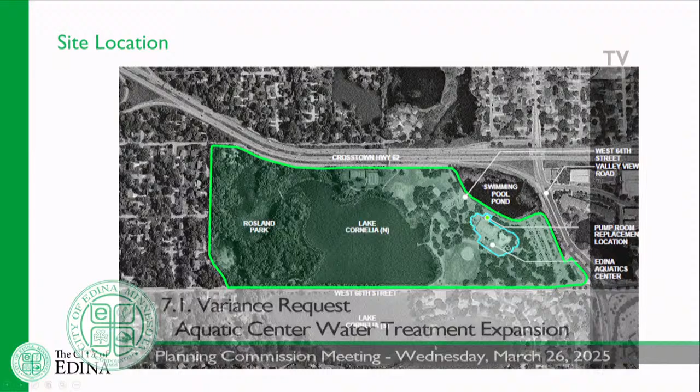Thank you, Chair, members of the Planning Commission. This is a variance request for 4300 West 66th Street, the Edina Aquatic Center, specifically the pump house building. This is the site: the pump room is on the east side, closer to the north part of the facility. West 64th Street comes around the parking lot and swimming pool, sitting between the pond and the pump house, then continues north.

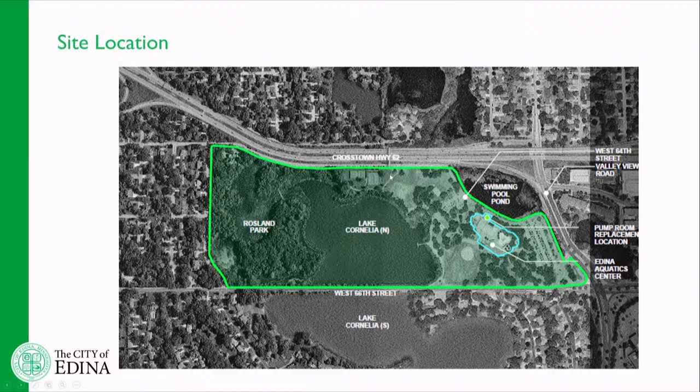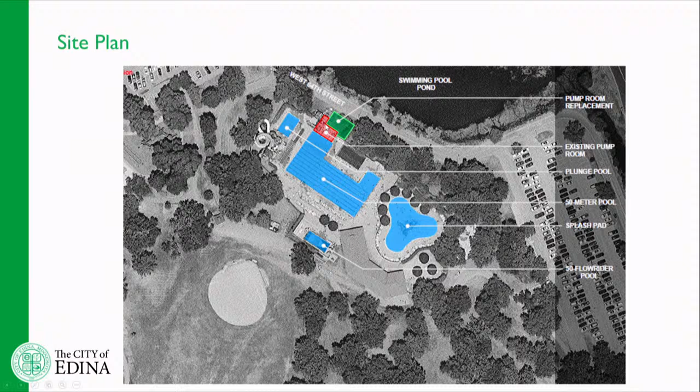The request is for a new or expanded portion of the existing pump house. This slide shows in blue all the water bodies at the aquatic center on the upper level, and on the lower level the red portion is the existing pump room, with the green portion being the addition. Most of the existing building is underneath the pool deck, so you only see a small portion when looking at the east side.

These are the existing conditions, looking down at the pump house. You don't see most of it — again, this is the only portion of the pump room currently visible. There's a loading dock and an access drive on the north side.

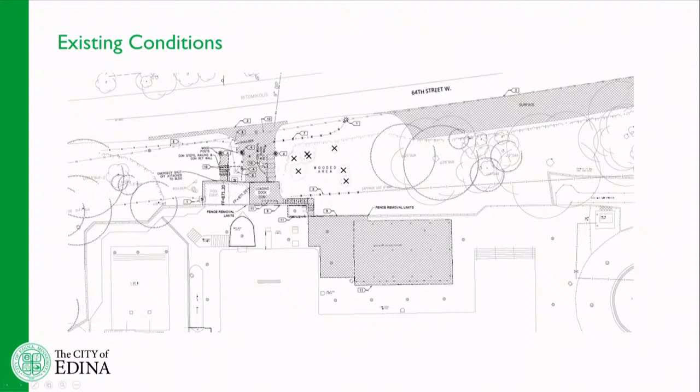Here are some photographs of the existing conditions, showing the east side of the pump house building. This is the portion not underneath the pool deck. You can see the pool deck further back, with most of the building underneath it, along with the driveway and loading area.

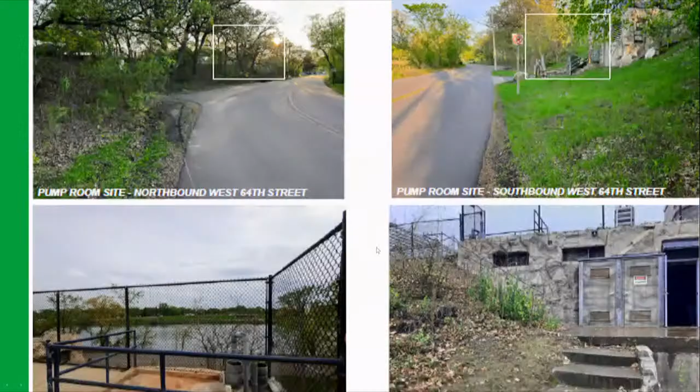Some more views of the pump room site, looking northbound and southbound on West 64th Street. If you're up on the pool deck looking down east over by the pond, and then an east elevation.

The applicant, HGA Architects and Engineers, on behalf of the client, City of Edina, is requesting an 11.5-foot variance from section 36-1268, requiring a 50-foot setback from the ordinary high water elevation of the pond, for a proposed pump house room facility replacement and expansion. The pump house room is located east of the original pump house room, situated between West 64th Street and the pond.

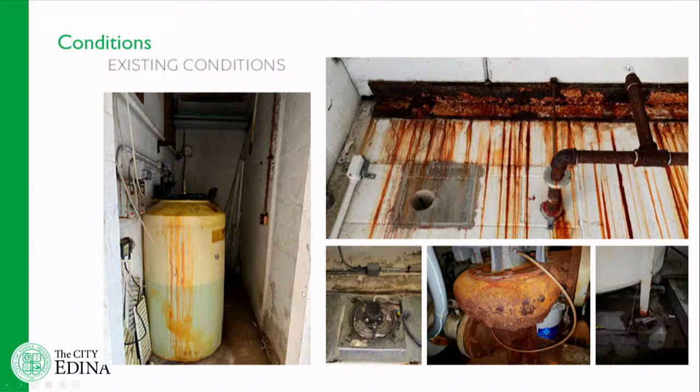Here are some photographs of the existing conditions and the interior of the building. The following slides include exterior and interior photos of the current building.

HGA Architects and Engineers were contracted by the city to perform a conditions assessment of the existing pump room. The report outlines several critical deficiencies, visible in the photographs, to the structure, mechanical and physical condition, which is operationally outdated. The Aquatic Center opened in 1958, with some current infrastructure 67 years old. The original pump room has undergone retrofits and additions over decades, but years of exposure to corrosive gases and a very limited headroom, ranging from about 8 feet to 9.5 feet, makes the space unsuitable for current equipment.

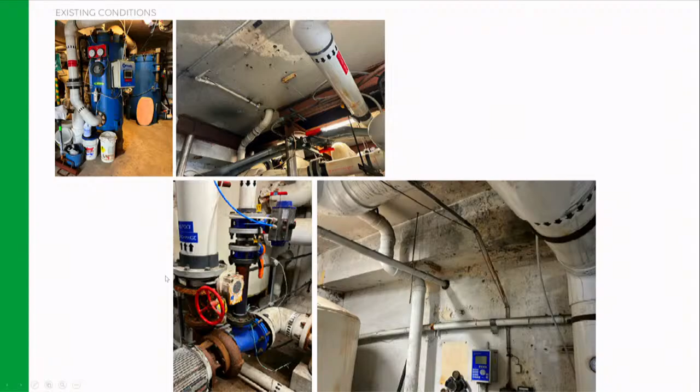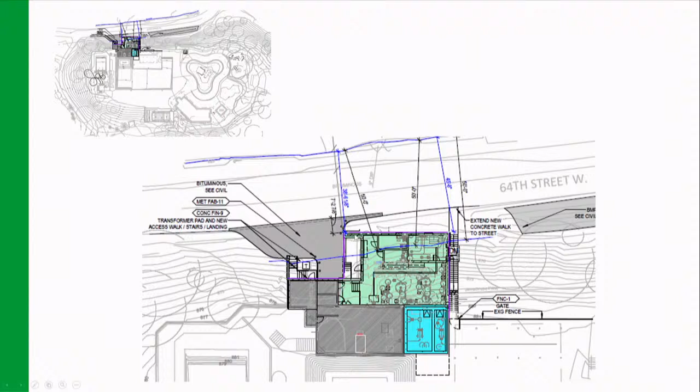This slide shows the proposed main floor site plan of the expansion, with the setbacks of the new portion of the building. The minimum setback is 50 feet — you can see the blue line marking the minimum setback from the pond. This portion overlaps into the setback area; the closest point is at 38 feet 6 inches, while the corner to the south of the new building is at a little over 45 feet, forming a triangular portion overlapping into the setback.

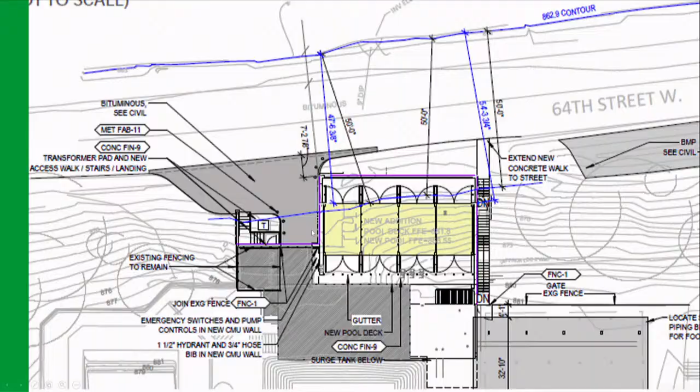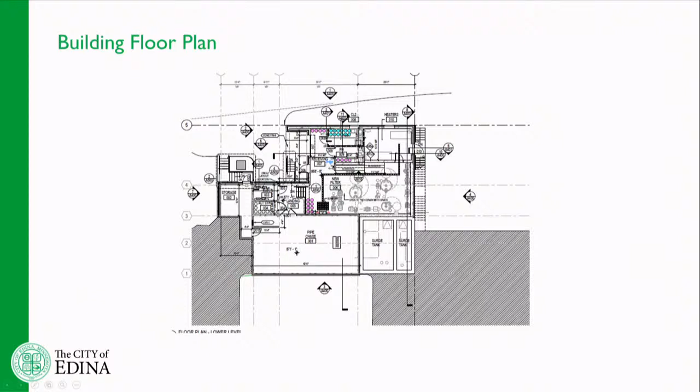And a more detailed building floor plan, giving an idea of the equipment and facilities that will be included in the new building.

These are some renderings and elevations of the new building and structure, showing the amenity deck with pool cabanas, looking northbound. You see the lower level, which houses the pump room with all the mechanical facilities, and then the upper deck with cabanas further away, and an upper deck on the east side of the cabana area.

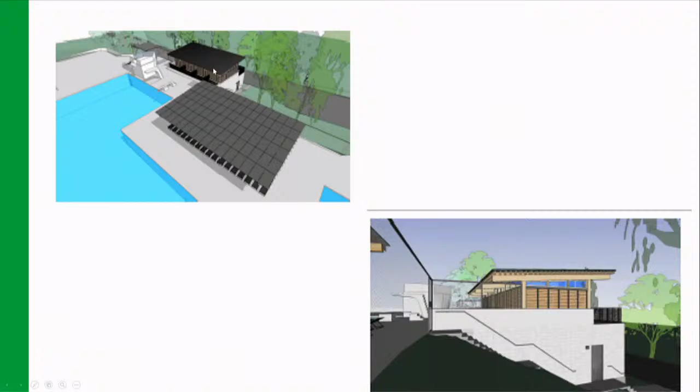This is a bird's eye view of the area we're referring to, also a covered area for lounge chairs in that cabana area above the pump room, and then an elevation of the south side of the building.

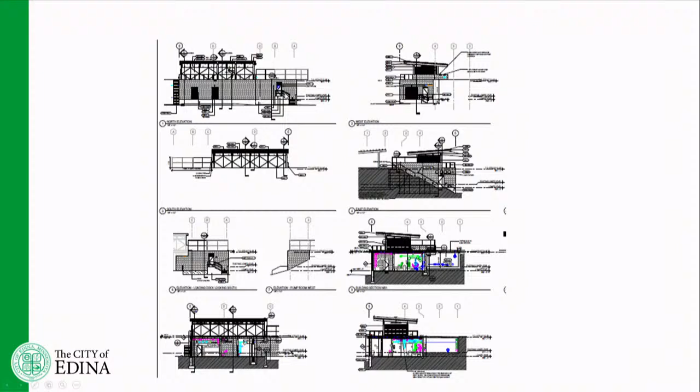This is a slide of the hand-drawn elevations and a comparison. They're not to scale to one another.

This is an existing cutaway of the pump room, showing ceiling heights of 8 feet and 9.5 feet, which are subpar for the equipment that needs to be installed. And then the proposed building with an increased ceiling area, and again, amenity deck above.

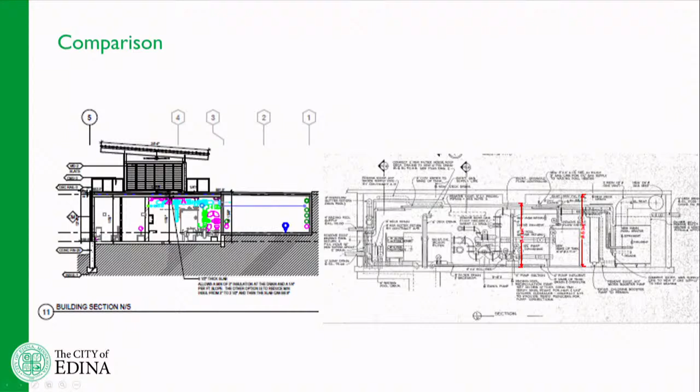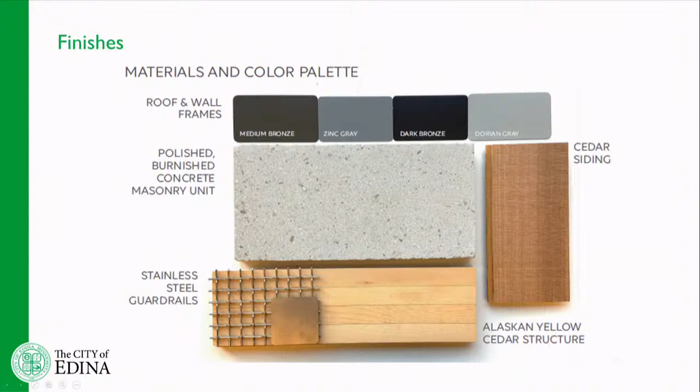This is the materials and color palette that's going to be used, and it will be consistent with the bathhouse above along the pool deck. This will all be graffiti resistant for the pump room area.

Staff recommends approval of a variance from the Edina City Code, section 36-1268, to allow an 11.5-foot variance from the requirement of a 50-foot setback from the ordinary high water elevation of a naturally occurring lake, pond, or stream, to allow a setback of 38.5 feet at the closest point of the pump room facility.

Approval is subject to the following findings: that the proposal for the pump room expansion is reasonable. The use is a permitted use in the single dwelling unit district. The aquatic center and all of its necessary parts are compatible uses within the single dwelling unit district. The use is consistent with the future land use designation for low density residential in the comprehensive plan.

The variance is needed due to the functionally obsolete size of the existing building, built in 1958 under different setback requirements, which are a current holdover from conditions not created by the applicant or the aquatic center. Prior to 1990, the setback required from the ordinary high water elevation of the pond for the pump room was 25 feet, and it conformed at the time.

The variance is to allow the expansion of the proposed pump house space that will not alter the essential character of the locality. The new pump house with the upper pavilion will enhance the user experience of the center and address current operational deficiencies with minimal intrusion into the setback.

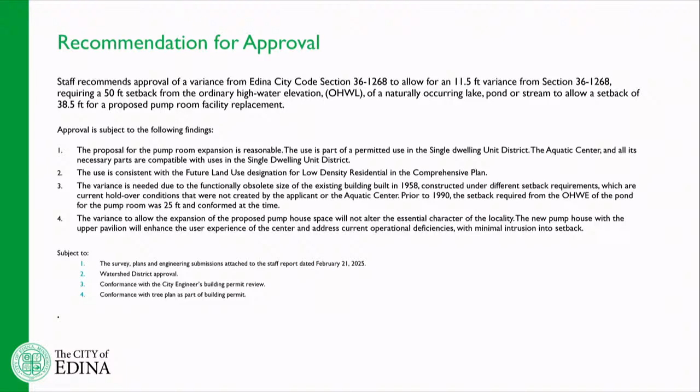Approval should be subject to the survey plans and engineering submissions attached to the staff report dated February 21st, 2025, watershed district approval, conformance with the city engineer's building permit review, and conformance with the tree plan as part of the building permit. With that, I'll stop and answer any questions you may have.

Thank you very much, Chris. Great presentation. Like I mentioned, we're going to offer it up to the rest of the project team or applicant to come forward.

If there's anything else you'd like to add? No? I see a lot of head shakes to the side. No? All right, gone. Okay.

I guess if any commissioners have questions right now for staff or the rest of the project team, this would be the time. Commissioner Day.

Do you know why we changed from 25 to 50 feet in 1990 for the setback? It was mandated by the Department of Natural Resources. It's not something the city had a choice about. Okay, all right.

Commissioner Nelson: I'm assuming you had some preliminary discussion with the Watershed District on this? Engineering has. They've been working very closely with the Watershed District on it, as has, I believe, HGA as well.

No other questions? Can you tell me a little bit about the swimming pool pond? Is that an official name, is that what the city calls it? Yeah, the swimming pool pond. It does collect runoff from the facility. I am not as well versed on that particular pond as some others. It is considered to require a setback, meaning it was a naturally occurring lake, pond, or stream.

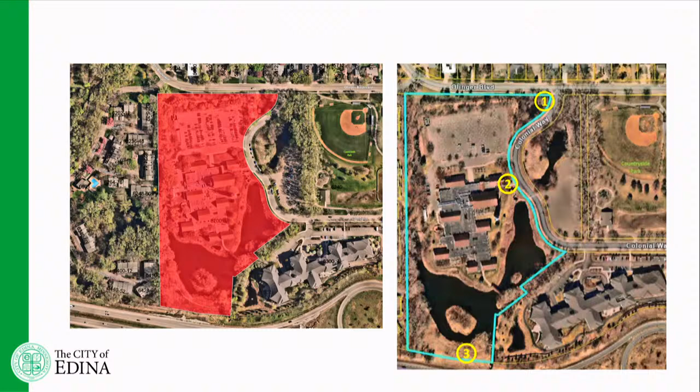Thank you, Chair and members of the Planning Commission. The request tonight is for 2 sign variances for 2 signs at Meeting House Church located at 6200 Colonial Way. The site is located at the southwest corner of Olinger Boulevard and Colonial Way, north of Highway 62 and west of Countryside Park. The 13-acre site is zoned R1 Single Dwelling Unit District and is the existing site of Meeting House Church. The church is currently in the process of replacing their existing signage on site, and is proposing to install 3 monument signs along their 3 street frontages: Olinger Boulevard, Colonial Way, and Highway 62. Currently on site there are 2 existing signs. At a time in the past there was a 3rd sign adjacent to Highway 62, but over time it has fallen.

The first variance request tonight is for sign 1. It's located at the intersection of Olinger Boulevard and Colonial Way. There is an existing sign in a similar location that will be removed and replaced with the proposed sign.

The variance request tonight is a 30-foot variance to the 50-foot setback requirement from the ordinary high water elevation of the naturally occurring water body. This would allow the proposed sign to be placed at least 20 feet from the ordinary high water elevation. Engineering staff has reviewed the proposed location of the sign and did not have any concerns with the location of the sign in proximity to the body of water.

In this instance, the 50-foot setback, as well as the required 20-foot setback from the curb for signs, would not leave any space for a freestanding sign at the corner at this intersection. There's also a 10-foot drainage and utility easement that the applicant is avoiding with the proposed location of the sign.

The second variance request tonight is a sign height variance for sign number 3, the proposed sign adjacent to Highway 62. The request is for a 6-foot height variance to allow a 14-foot tall monument sign. The applicant is requesting the additional height due to the elevation of Highway 62. The additional height will allow the sign to sit 8 feet taller than the center line elevation of Highway 62, which is the allowable height for monument signs in the zoning district.

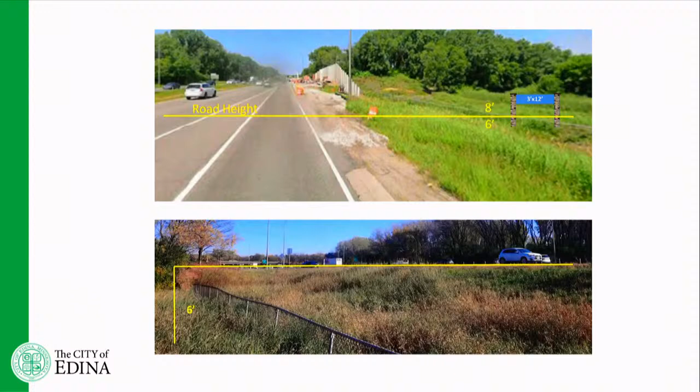Staff believes that the requested variances are justified. The purpose and intent of the code is to allow for monument signs that provide visibility without causing impacts on safety or sightlines. The requested variances would be in harmony with the general purpose and intent of the code, and the use of the property would remain consistent with the comprehensive plan.

There are practical difficulties in complying with the city's ordinance. The elevation height for sign 3 is reasonable due to the difference in elevation of Highway 62 versus the subject property. The applicant is requesting the additional height so the sign is visible 8 feet taller than the elevation center line of the road. The additional height for that sign is needed for visibility.

The location of sign 1 is in a similar location to the existing sign on the site at the corner of Olinger and Colonial Way. The proposed location of the sign sits much higher than the body of water and won't have any negative impacts. Like I said, the city's engineering department did review the sign location and didn't have any concerns with the sign in proximity to the body of water.

In each situation, the circumstance is unique to the property and is not created by the landowner, and the proposed signage will not alter the essential character of the locality.

So tonight, staff's recommendation is to approve both of the requested variances based on the findings and conditions outlined in the staff report. I'll note again that one of the conditions of approval is that illuminated signs would need to meet the city's illuminated sign requirements of the sign code.

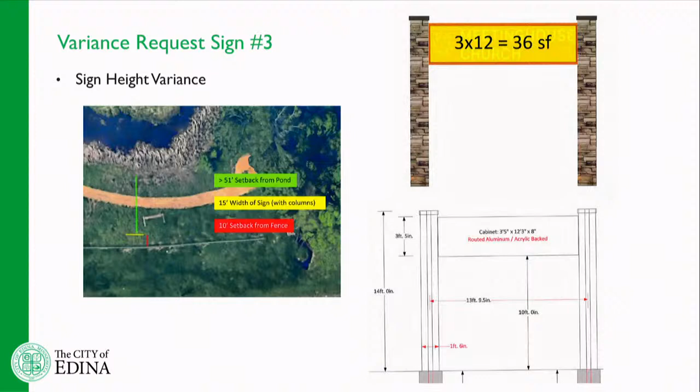Just real quick, Earl, all the signs appear to be double-sided. It was a little hard to tell the one over on Olinger if it was double-sided or not, but it backed up to trees, so I assume it's not. Correct, that one will be double-sided. It has been single-sided at a little bit of an angle as you drive in there, but this one will be double-sided. It'll be perpendicular to Olinger. Correct, double-sided.

Any other questions? Commissioner Felt.

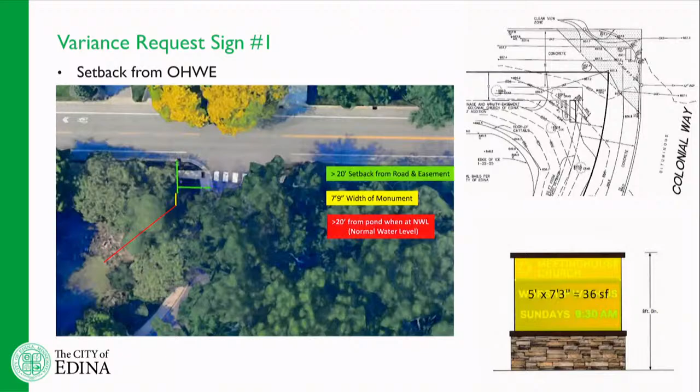Are you planning on keeping the signs lit or electrified 24 hours a day? Or what's the plan for that? I think the plan really is to go with the city rules and regulations on those. We may just turn them off at 10 o'clock at night. There's no reason probably it has to be on.

Really don't want flashing lights. I'm sure the neighbors don't either. It's mainly so we can change some of our things once in a while with different services, different things going on. It's not to be a billboard that's advertising all the time.

That'd be nice if it was turned off at 10. I don't know what are the... Yep, the hours of operation are that the sign's turned off between 10 p.m. and 7 a.m. unless the use is open.

Okay, thank you. And just to note that with the video board, it's also not allowed to be changed more than once an hour unless it's the time or date or temperature.

Hopefully the temperature is accurate. You guys remember those back in the day where it's like 900 degrees out? Hopefully you guys don't have those struggles.

Any other questions? Thank you for the presentation.

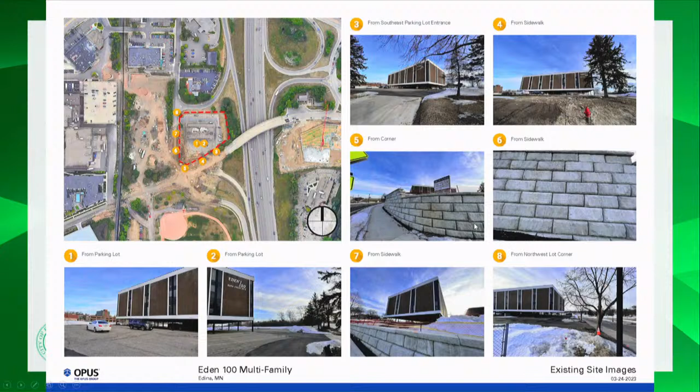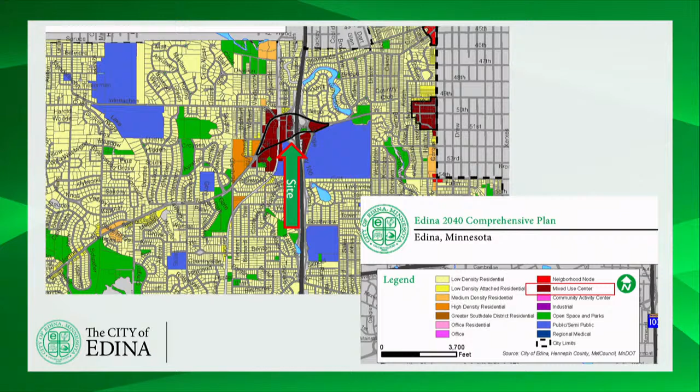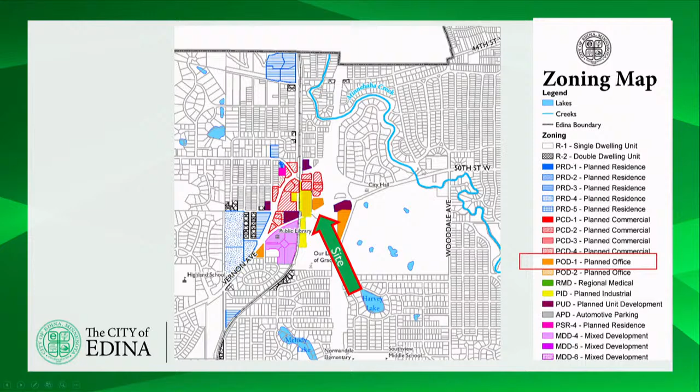You may recall this site received a preliminary rezoning from the POD to a PUD. It was for a housing project, and I'll show some slides of what that looks like here in a minute. Same goes for the Public Works site—preliminary rezoning was granted for that site for the cooperative housing, the restaurant, and a park. Both of those projects did not move forward, so there was no final rezoning. So the existing POD is the zoning on the site.

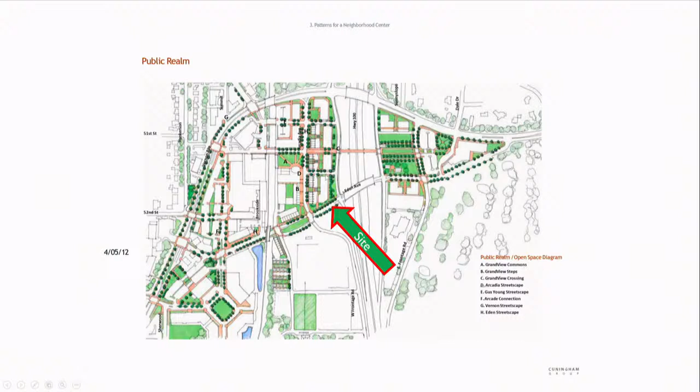Within the Grandview District Development Framework, also mixed use, these are some graphics of what was contemplated for possibility of being built on that site. Housing along the street, some renderings with some housing. There was also some thought of Chair Bennett's favorite slide here.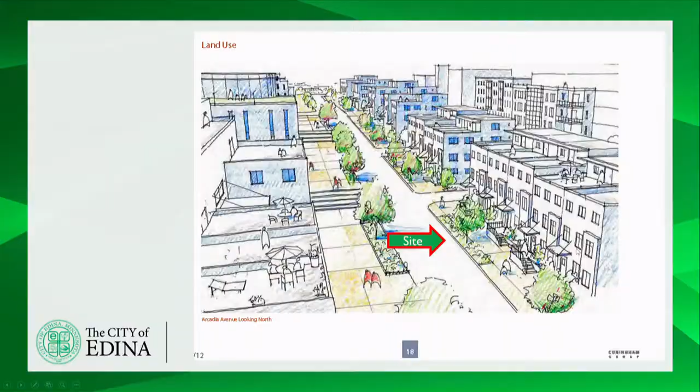There was talk of either residential or office on the site as we went through that process. We also did the transportation study in this district. There is a new frontage road planned on the west side of Highway 100. All of that can be accomplished within the existing Highway 100 right-of-way, so there's no additional land needed with this project.

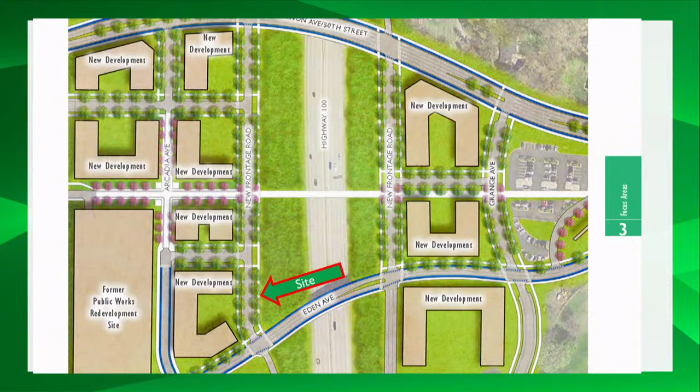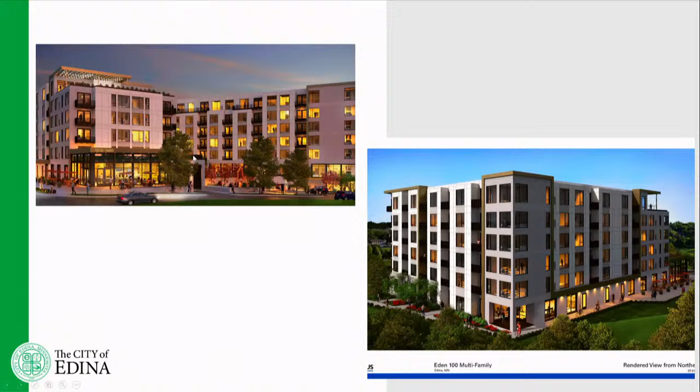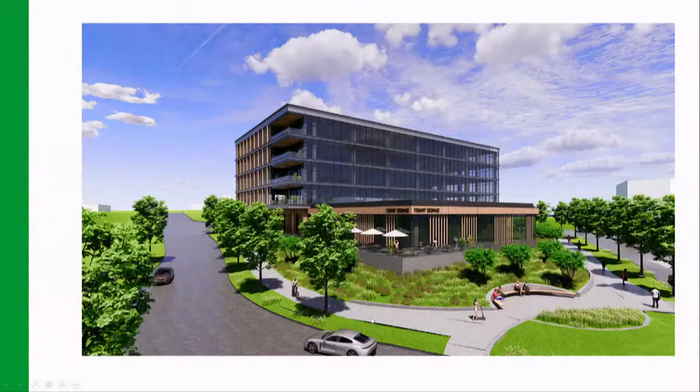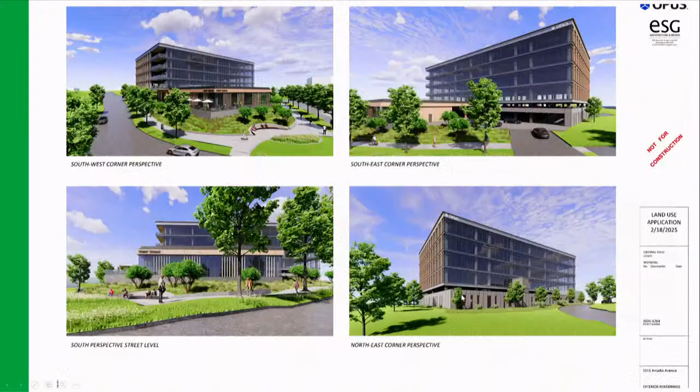So here's a look at the proposed structure. They would tear down that existing building. It's about 38,000 square feet, the existing building, and build this 112,000 square foot office building. There also would be retail space potentially, about 6,000 square feet, potentially a restaurant also, located here on the corner. So note the expanded sidewalks, green space along the roadways. The applicant, as part of their presentation, actually their pictures are a little better than this, so you'll see some enhanced imagery as part of their presentation.

Primarily a glass building.

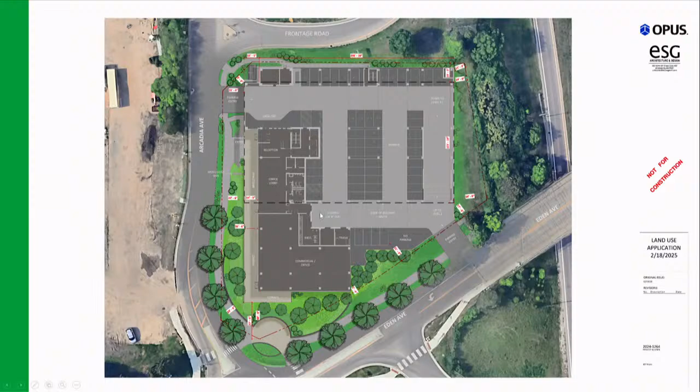Here is a look at the site plan, with one access off Eden Avenue here, another off of Arcadia. The bulk of the building is set back with that one-story commercial space located here. So this request requires rezoning from Planned Office District to Planned Commercial District 2, a subdivision or new plat. There's 7 lots currently on that site, so they're going to consolidate them into one with a new plat, a site plan, variances on all 4 sides for the building, a variance from our floor area ratio requirement of 2.

They're proposing 1.5 is the requirement; they're asking for 2. A variance on height to allow 81 feet, where 48 is required. And a variance for the building materials, as I mentioned, it is primarily a glass building. Also a variance for screening and setback requirements for utility equipment.

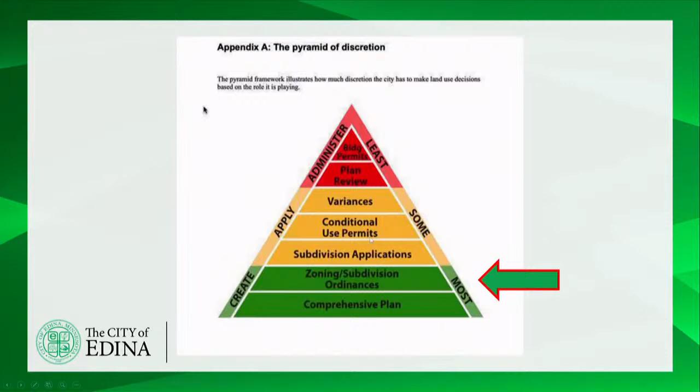So looking at our pyramid of discretion, this is a rezoning, so the city does have discretion here. Variances and the subdivision, you also have some discretion as well.

Even if a restaurant goes into the site, the project would be code compliant for parking spaces. They would meet the first floor building height. There was some flexibility there for the residential building—13 feet was the first floor. This one would be 20 feet. And again, flexibility on the materials, or a variance.

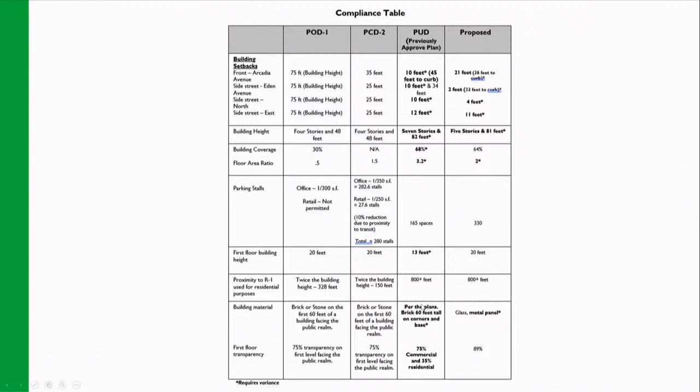All 4 sides have street frontage. We've got the highway frontage to the north and to the east. There's also quite a large right-of-way along Eden, about 30 feet. So the building from the road, as you walk or travel down, would be set back a little further perception, even though a 2-foot setback is needed right here. It would be 21 feet back from Arcadia—this is a 35-foot requirement here.

And the mechanical equipment where a variance is also sought is for this material right here. They are proposing to screen it within the right-of-way. This would need to be approved by MnDOT to allow that screening within the right-of-way, but that's where that variance is located.

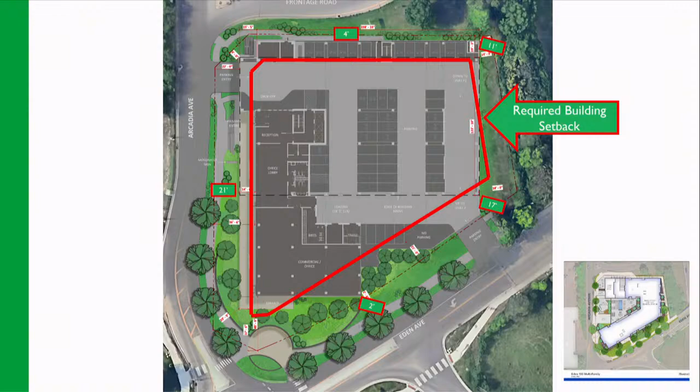So the primary issues are the rezoning to Planned Commercial District 2—I see a typo there—is that reasonable? And are the variances justified?

So we'll start with the rezoning. Staff does believe that it meets our criteria for rezoning. It is consistent with the comprehensive plan. The site is guided mixed-use center. The uses contemplated within that district are all allowed by the PCD2 zoning district. The project would advance comprehensive goals to create a vibrant, pedestrian-oriented development in the area.

The project would not be detrimental to surrounding property. It would actually benefit some of the commercial areas with more employees during the day. A traffic and parking study was done by Stantec.

Ed Terhar is on the call with us this evening to answer any questions you may have. The study concludes that the existing roadways can support this project. The roundabouts were all designed with development in mind on this site.

The FAR is consistent, or less than the previously approved plan, but it is consistent with recently approved projects. The Mason Green is 2.5, Avador 2.2, and that senior housing project at 3. The PCD2 zoning is consistent with the properties to the north and northwest.

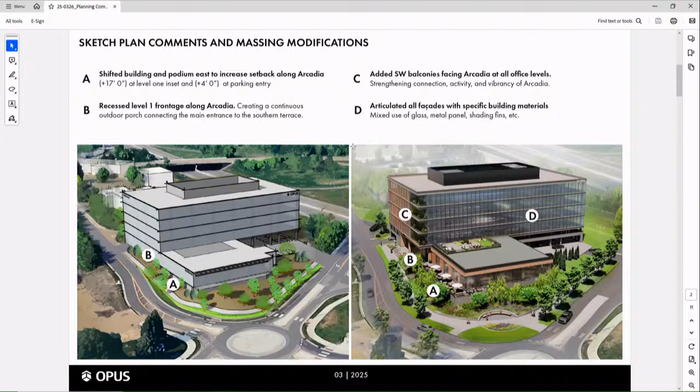That also allowed us to create this recessed level 1 frontage along Arcadia. There's this arcade breezeway that expands into a wraparound porch as part of this podium condition, and balconies added at the southwest corner. We wanted to celebrate Arcadia and strengthen the connections, activity, and vibrancy along it, and articulated all the facades with specific building materials.

But in doing so, with the building shifting, we still had ample space between the building and the sidewalk to really celebrate the groundscape, and hopefully some of these renderings will show some really unique landscape elements.

This one is just to quickly talk through the design concept summary. Overall, the building massing is relatively simple. This portion in green is sliding in and being tucked under the building proper. So we're all talking the same lexicon, we started naming this the dock. It represents, in the renderings, a more natural material, and it juts out almost like a body of water within this sea of greenery. We really like the idea of celebrating the Minnesota ties with this dock reference, while still celebrating the building on stilts, or the pilotis, from the previous design.

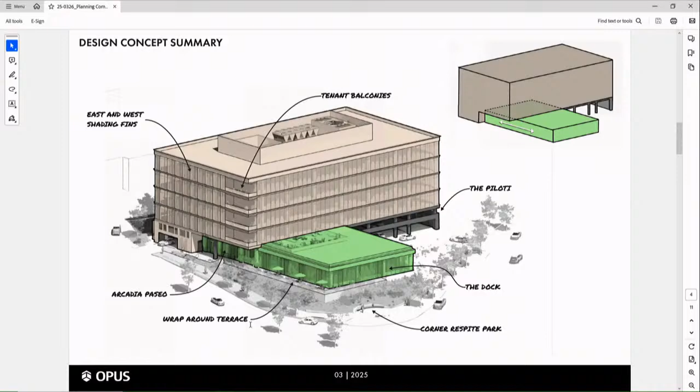When it comes to landscape, we've worked with Damon Farber and our whole team to dive into the planting palette, intermixing shrubs, pollinators, tall grasses, and creating color and variety in the landscaping. The additional setbacks from sketch plan that we worked through with your team really allowed us to celebrate the landscape here and create more opportunities for pollinators and color.

We've also still proposed an area of respite at the crest of the pocket park, so to speak, with this seated bench element pulled off from the roundabout to allow for a little more safety from the road.

This rendering showcases the topography as it moves north to south, so you can really see the topography drop off and the dock element protrude into the space. Here is the primary entry. Again, we relocated the door to be on Arcadia itself so we can celebrate the Arcadia streetscape as an opportunity to pull people in, and once you're up on that breezeway, you can make your way across onto that elevated terrace.

Here's a view of the north side from the frontage road. And lastly, here's our hero shot of this dock element coming out, what could be a really celebrated space with beautiful landscaping, and hopefully a great asset to the residents of Edina.

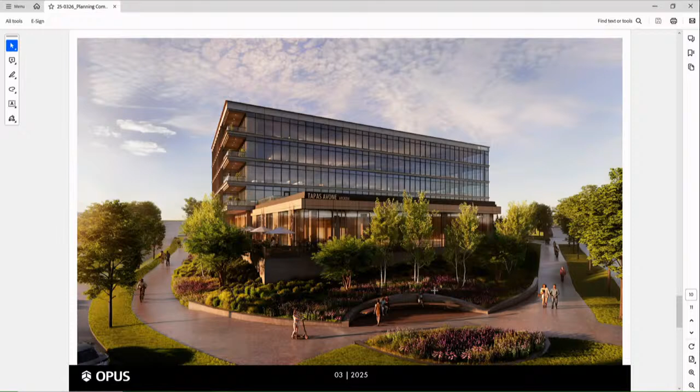Again, I like the fact that there's office being proposed to go in here. I really like this pedestrian area and the idea of having a little bit of retail in there to help support the folks that are in there. So really, I'll just leave it at that. I didn't want to ramble on forever, but...

I've made a lot of notes, and I want to try to start with some of the positive there. Where you've got the entrance, that just looks to be plain concrete panels, as does - and I'm not sure what the top is there, it looks like the same. Now those might be metal panels there. Yeah, but again, if you know, that material could change - that would be my vote. But thank you for your presentation.

Thank you. Could you speak to the material of those? What can you confirm it is, and the availability to change it, or?

So the material you're seeing there - that is the same metal panel that is on the building above. The idea of not letting that be like a stone or a brick material, for instance, is that we really wanted the building to feel like it touched the ground, to create some grounding elements in the building. So we felt that in drawing a line, so to speak, and having the bottom portion be brick, we are kind of further creating a podium building, whereas we really wanted to celebrate this as an opportunity to touch the ground with the material of the building above.

And I guess to follow up on that, what is the material of the dock that we're seeing? So we are currently studying a whole bunch of materials for that. The idea is that this is like a wood look material. We're looking at a phenolic product, which is like a high pressure laminate. We're looking at real veneer sheets that are pressed with polycarbonate. We're looking at some actually recycled wood fibers that are on an aluminum core, so that one would actually feel like real wood. And then additionally, a metal panel that is a wood look metal panel as well. We're kind of running the gamut right now on pricing various options.

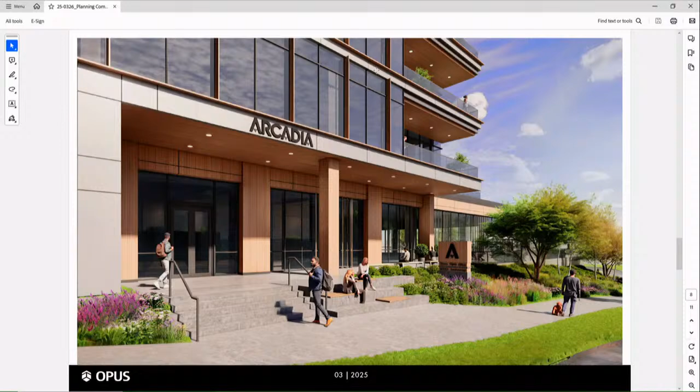I'm actually okay with all of the open glass. I do want to ask about lighting though, making sure that any kind of ceiling lighting is handled well.

All of the lighting will be on occupancy sensors. So specifically, in the evening when folks aren't working, all the lights will shut down. And then when people are driving up and down the street, especially on 100, everything is kind of shielded.

In terms of reflectivity? Yeah, our general base spec is going to be something somewhat low reflective so that we don't have to worry about sunshine kind of blinding cars. So this will certainly not be a mirrored building from the 80s.

We assure you. So how many employees? You think you're going to have 30% of the floor plate give or take? Yeah, about 30,000 feet. How many employees are going to be within a few miles?

Within a few miles, I'd have to pull that number. I know the majority of our employee base is all Southwest. Most of the 105 employees, I'd say over 75% are within 3 or 4 miles.

So I'm going to bring up the biking again - I asked you last time about this. If I biked here to go to the tapas restaurant, because I would go to a tapas restaurant, I'm going to go behind City Hall, go on the south side, park in the back, and go in the back doors. Just letting you know that.

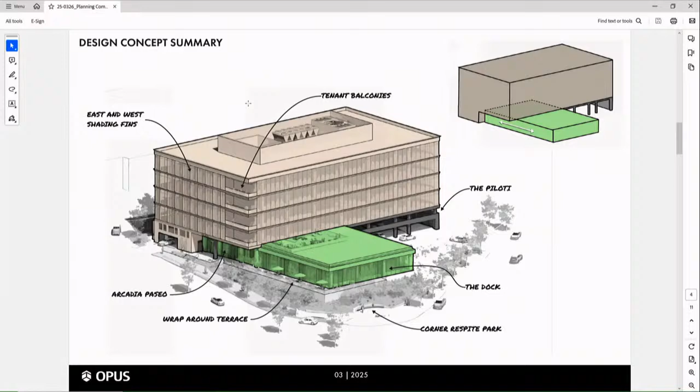Okay, the other one I want to talk to you about is the variance for the 200-foot. Do you have a view from the northwest? You've got a view from the northeast. I believe we have a northwest, maybe in the city presentation, is there one? Which elevations are you asking for the variance for the 200 feet?

Yeah, it's both north and south. The north elevation, I think, is 212. And then the south elevation is 205 feet long. So both of those are just over the 200.

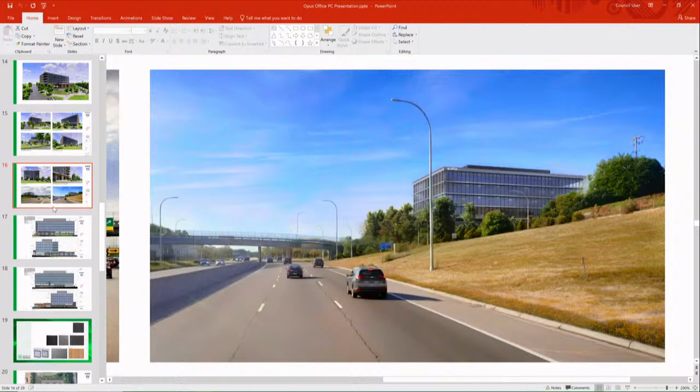Can you bring those up? You can kind of see it here. That's the north. Otherwise you'd probably have to do the actual elevation. Oh sure, there you go. Yeah, that's the north, that was the northeast. I think it's the next one, right? This one, so that's the north elevation. Okay, top image. So I believe that's the longest run, is what you were referring to.

And the south elevation has those balconies on it. Yes, and those, for me, break up that 200 feet. So you're really close to the 200 feet. Would you consider doing balconies on that northwest corner?

No, the northeast is the highway. The northwest is over the... you know, we've looked at that at one point. They were trying to keep a relatively square plate for rentability and for what we see in the market. And we also have seen some instances, and I won't name buildings, where balconies facing highways are empty all the time, they don't get use. Oh, you were saying facing west, on the northwest. Oh, I see.

I feel like, just given the size of those plates, it might be a little over-balconied if you were to compare interior space versus exterior space. Yeah, it makes me a little nervous to chop up the plate. Taking out the one corner, I think, was manageable. I think if we started doing it again, it would be challenging. Yeah, because that's the only one, the 200-foot uninterrupted, more than 200-foot, that's there for a reason. So that's the variance that I'm having a little bit more trouble with. I don't have trouble with any of the other variances. And one of the reasons, I'll talk about this in comments, I don't have to talk about it now.

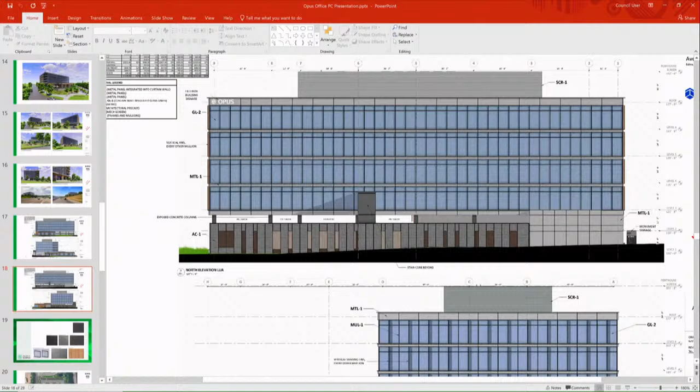And then tell me about the screening for the transformer. Yeah, so that transformer, unfortunately that's where the power comes in, and that's where Xcel is requiring we have the transformer. You've got no choice there. Yeah, so I'm trying to find the best angle. I don't know if it catches it there. Yeah, it would be kind of here. But maybe, Matt, do you want to talk about the actual screening of it?

Yeah sure, we're currently focused on a couple of options, be it an aluminum screening element, or potentially it's a material akin to what the dock is doing, so that we have some continuity with materials. And bringing that wood look over there might be a nice opportunity versus it just being painted aluminum. Good, so you're thinking through that. Yeah, okay.

That's it for my questions. Thank you, I think it's a handsome building. Thank you.

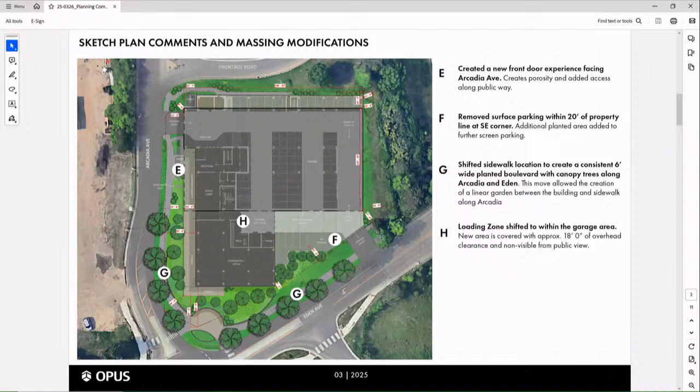Other questions? Yeah, Commissioner Hanneman. So these images are really helpful, I wish I'd seen them and been able to digest them in our packet a little bit. But lacking that, I went back to the 2023 proposal with the building, and I'm trying to compare different visuals of what we had last time, what was approved with the apartments, and then what I understood about what was before me.

And I guess, the last 2 years I went back and rewatched all the videos, the consistent comment has been activation and engagement on the west side. I think there was even some questions when you did the apartment, which opened up to the west - was that enough? So I guess I'm having trouble, and maybe you can explain why we can't orient the public space more to the north and west. Because I think Chair Bennett had even mentioned we don't care about the setback on the highway side, push it that direction, push the height. Why can't we preserve some of that space on the west for that engagement, since this is supposed to be the jewel box and the entrance into Grandview?

I think kind of two things for that. One of them is our stormwater mitigation strategy. Our stormwater, really the only place we could get it to fit was on the east side. So there's a limitation on how much we can shove our building east. We did it as far as we possibly could the last go around to get the additional space. Because of depth underground, or what do you mean?

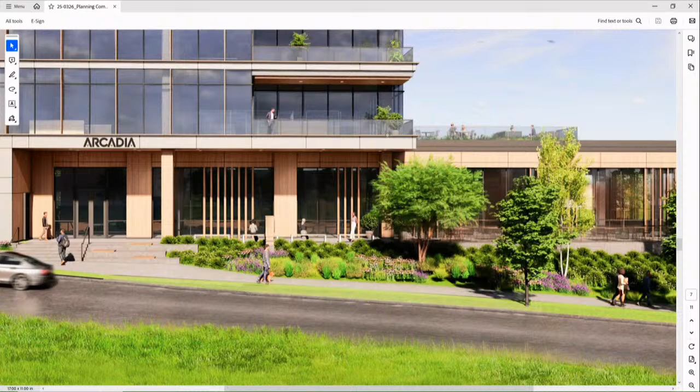Yeah, that's probably a good note if you look at the floor plan. Just sharing that one part of the arcade is more public than private.

That area, before you get to the restaurant space—if it is a restaurant that hopefully has outdoor seating—that's more of a public area. That's, as Matt mentioned, up the bench and up the stairs there.

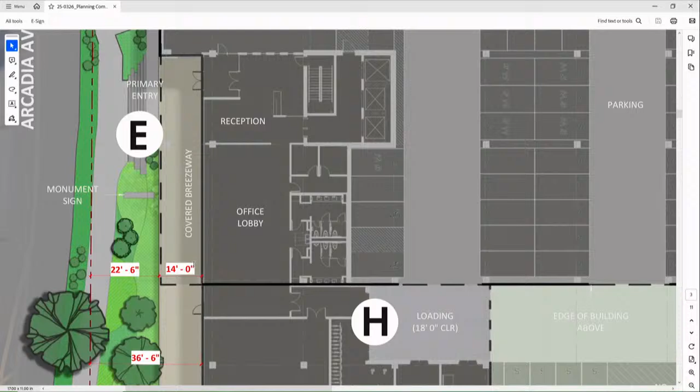Going back a little bit to the stormwater, just for my own edification, if the green space was on the west side, couldn't the stormwater tank go under that? It could, and originally we put it there, but then we learned that we can't have trees there, and it occupied so much space that we really... fair enough. Got it.

The sidewalks are smaller here now, right? They're all down to 8 feet.

I wanted to reiterate the comments of Commissioner Nelson. I emailed Carrie the other day driving down 62 at that Optum and UHG buildings. Those were not from the 80s, and those are pretty glary. So I do have a real concern. I mean, it's beautiful, but it is right next to a highway. Not that I don't believe you, but those buildings weren't built 50 years ago, and you're still dealing with this while you drive in the morning. So I think it's about working with you folks as well—we've heard it now a couple of times, and we know that from a creature comfort perspective inside the building, you don't really want a highly reflective building because you don't get as much visible light transmission through the glass. So I think we're at least collectively on board with doing less reflective glass.

But I guess I've also observed buildings during certain times of day, and I think there's almost nothing you can do about glare at a certain angle from windows. I've observed this even with buildings that are primarily opaque with punched windows—you'll still get that glare, and it can still be a little blinding. Well, absolutely, and you can't build any building just for one moment in time, one week of the year. But it feels like a very suburban office building, beautiful as it may be. It doesn't seem to have the quasi-urban, walkable neighborhood kind of vibe because of so much glass. It feels very modern that way, so I would just challenge whether or not we need quite so much, at least facing the highway. That's all my questions for now.

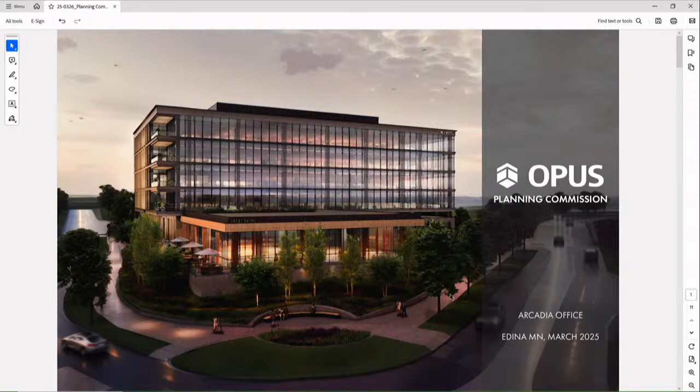And I think that's a wrong result—you don't want that. Maybe in the winter people want to do that walking, walking through covered space, but again you're just inviting people to walk through the parking area, since you still have stilts, it's still open right on that east side. It is, yep. So it doesn't seem like you're walking along a wall, it's kind of open. I was curious, and I wouldn't care about that if the building was shifted all the way east and took all that space out of there. But now that you're leaving it there, there's definitely more to be desired.

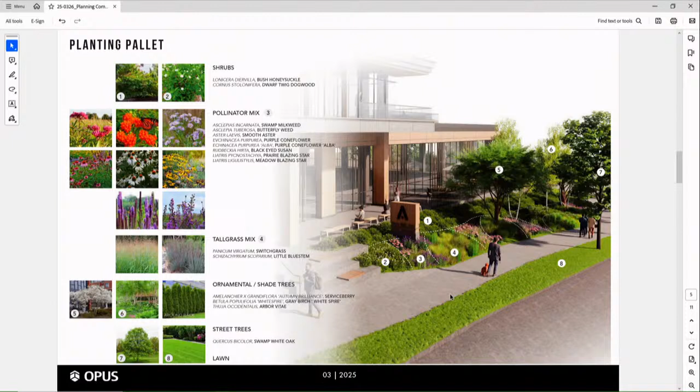We want to just keep maintaining four sides of a building, even if it's against a highway. It just offers more mobility and maybe provides other options, like maybe you prefer to park your bike on that north side, whatever. You make it easier to get around.

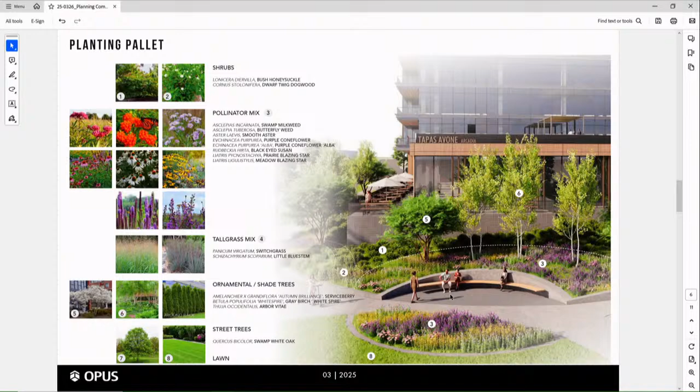Yeah, just to add on to what Jimmy was sharing here, I know at some of the buildings what they actually do is they use those walkways around the buildings as a walking meeting. So typically you have a meeting in an office room, you book a room, but what I see a lot of managers do now is they use these spaces outside to hold their meetings, doing one-on-ones while they walk. So that's just an idea of an amenity or value you can give your tenants, that they could walk around the building and hold meetings.

Sure, and I think part of it too is trying to bring the energy candidly to Arcadia and trying to not put it in between a parking garage and a highway. There's a whole bunch of buckthorn there today, and I don't think it's going to be a great experience over there. We're trying to bring the energy to Arcadia, where hopefully the public RFP site gets developed and the area continues to develop, and we've got a really nice boulevard along Arcadia with some of those changes we're looking at.

Maybe a last question - it kind of piggybacks what Commissioner Felt said, but could you go back to the west elevation? I feel like when you see this side of the building, mass-wise it's a bit more digestible and matches some more of the intent of the framework, which was smaller masses getting taller along the freeway, which we talked about, and how you guys decided to turn it the other way. But seeing the one north elevation, I do have concerns that without one side being taller than the other, it's just a really long, continuous run of sameness.

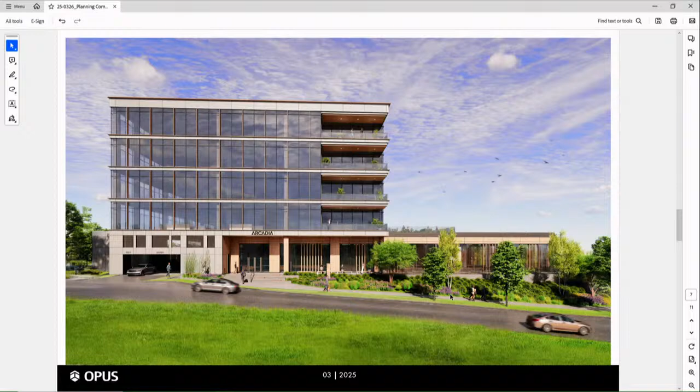I just think it'd be something we'd have to study right now, because given the kind of purity of the massing as it is, there's not an easy button, so to speak. There's always the idea of just shifting the glass box to be kind of two offset glass boxes, but from an architectural perspective we'd want to vet to make sure that's not just arbitrary, and that it both functions on the interior and serves a purpose on the exterior aside from just breaking it up.

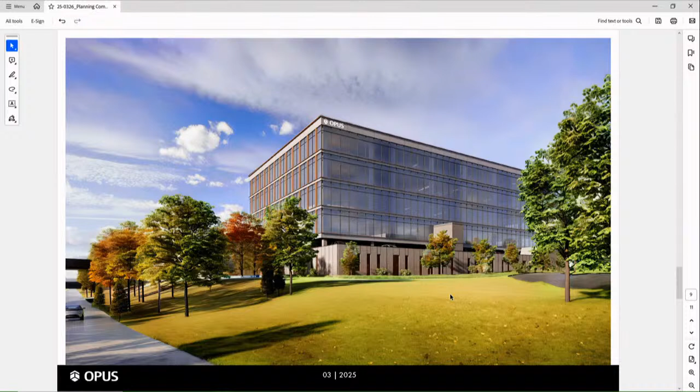One thing to quickly note is that first portion of that parking on the north side does push out, so there is some depth relief from the podium condition to the building proper. I'm sorry, did you just say it pushes out, like the front of those cars is open to the sky? Correct, there's a portion of that mesh, the tips of the tops of cars there. Obviously we're going to block headlights, so those won't be visible, but yes, that portion of the podium does push out.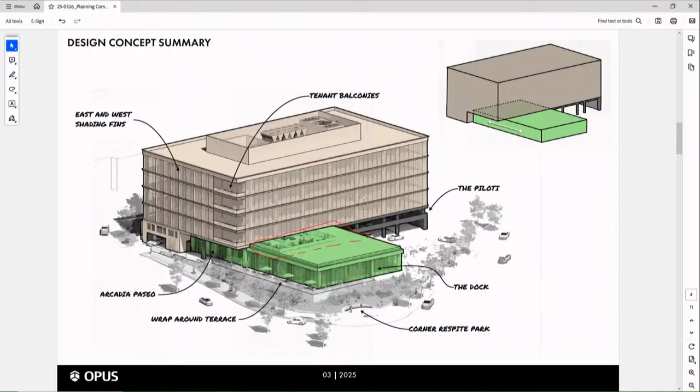And I think we certainly can study this - we knew this one would come up with the length on the north. My concern is that we're going to break it up just to break it up, and if we have to we can certainly look at it. But we're really close - I think we're at 212 and it's 200. Candidly, we're probably going to end up with a jog that's just a jog to not have that variance.

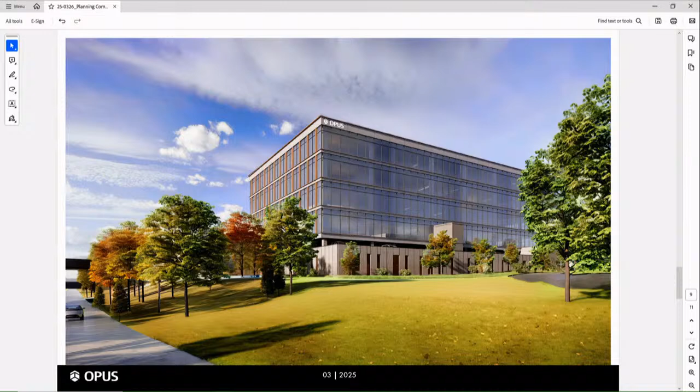We would look at the architecture, of course, and try to find something that works well. Is it again looking at balconies? I don't think that's the right answer. So from that other elevation, you do have a stairwell that sticks up only to serve the first level? It's a transfer condition. Okay.

Just thinking, maybe there's something you can carry up on that. I definitely have a hang-up with not shifting the building east. One of the questions I'm still thinking about is, sometimes with stormwater mitigation, it can get buried under a portion of the building and you sacrifice some parking, and you have your foundation wall over to one side. Was any of that considered to maximize space?

Because I see this and think it's really great, but the next step better is to get more space on that west side, in line with the Southdale design experience guidelines as well as the Grandview framework.

That notion of stepping the building back - as I see it, you're coming down Arcadia and you have a 5-story building right next to you. Just stepping back that first level, I feel like you guys kind of did the opposite in one way, but improved it for half the building where you have that balcony for the main level stick out. But now it's kind of stuck under the building.

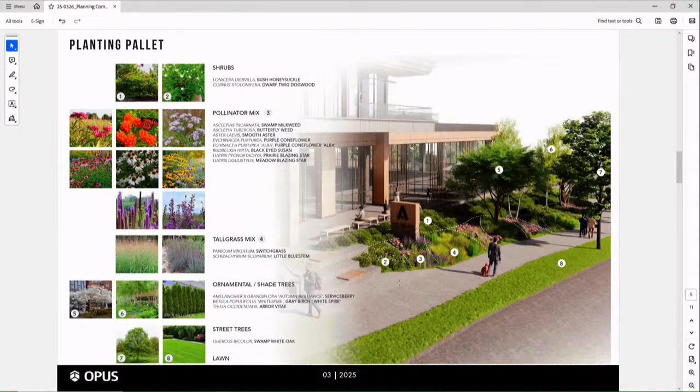That's where I'm looking at the site view or site plan, and it just looks like everything could still move east quite a bit, at least 10 feet to the property line. That's where I would for sure give up a lot of the setbacks close to the highway. I know that's where you have the stormwater, but I feel like you could waste some parking and bury it under the building.

Yeah, I don't know, that didn't come up. I don't know if Edina is one of the municipalities that allows that. Some municipalities do, and some absolutely don't. The building code strictly says that storm plumbing, which is interpreted as stormwater tanks, needs to be 10 feet away from a building foundation. But some municipalities, Minneapolis being one, allow you to stick it under your lowest level of parking.

Yeah, because if you're on a small site and build to the edges, you have to have it under your building somewhere. Right, so that's just what came to mind, and I feel like if the design were that way, maybe I wouldn't have as many questions or reservations, honestly. So it's just kind of where I'm at.

That's it for my questions. Any other questions? Yeah, Commissioner Fowl.

To your thought, I do like the public walkway in front, having that underneath, but I just want it to continue around the building. Right now you've got it kind of cut off for the restaurant, and the public can't go all the way around. Oddly enough, we are looking at that and possibly needing exiting. So it wouldn't be a sidewalk per se, but we're looking at a connection that would come here and either turn north to here or come down to the sidewalk.

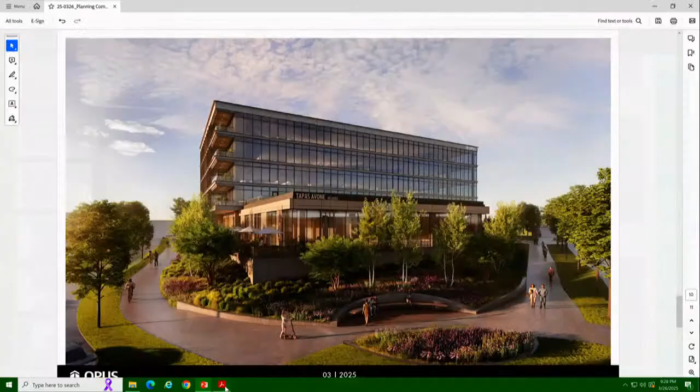For me, if there's that warmth, or a little bit more of that warmth, on the main level or the dock piece as it shifts through the building—not just on one side, but maybe all the way through—and that's at pedestrian height, I think if you can experience the wood at your height as you walk around this building, that would be an attractive thing.

Gonna add something? Mainly what's already been said, really around how the dock is set off from the rest of the building and unresolved how that's going to play in, and also the entrance from the back—like Commissioner Hahnemann said, I feel like we didn't see a lot of definition there, how that kind of interplays with this.

In terms of architectural presence, how much it stands out, how much it's less of a glass box and more of something visually interesting—I'm mostly thinking about that dock piece and how, as you said, if it's warm all the way through, how that stands out compared to the rest of the building. If it's visually intriguing compared to the box underneath, that would be a good thing. But I don't think that's been completely set in stone yet. Use my metaphor, yeah.

Other questions for each other? Anything, Stu? Yeah, you got something.

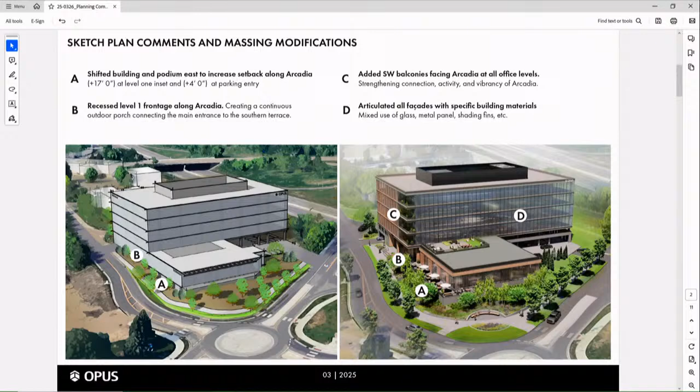Did we have a view from Eden in the newer, fancier renderings? Is that like a 10:30 p.m. shot? Maybe we could go out and see what it looks like. And you kind of get—this obviously isn't a rendering, but you start to get a little bit of it here. I think just that image in general would be really helpful to future conversations.

Understanding how the pedestrians and bikes would access—could be with simple, nice materials, signs, and other things.

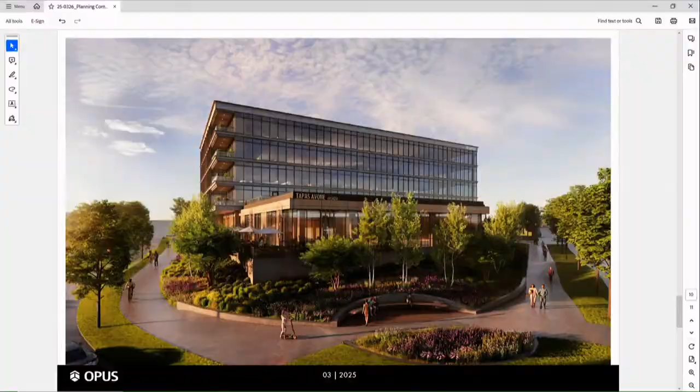Well, it seems like we have maybe a couple conditions: east access entrance prominence and details around it, sidewalk around the plinth, and then a different material choice at the ground level by the parking entrances.

Are there any other conditions that feel like there's kind of unanimous support of? That it's a tapas restaurant, can we put that as a condition? Yeah, that was part of that.

So we got three conditions. I don't think we need a variance on the 200-foot part. I think it's vaguely worded enough that you could legally argue they met the requirement, as staff said too, so I don't think we need a variance there.

I think we ought to be cautious too, because maybe the council will want to apply it. So I don't know, maybe just be prepared—maybe it's doing what Meriwether said. I'm looking at the west elevation, maybe it's just a row of balconies that then at least bring it under 200 feet. Or maybe all the building services move to that north elevation—the restrooms, the mechanical, whatever—right now it's in the middle of the building.